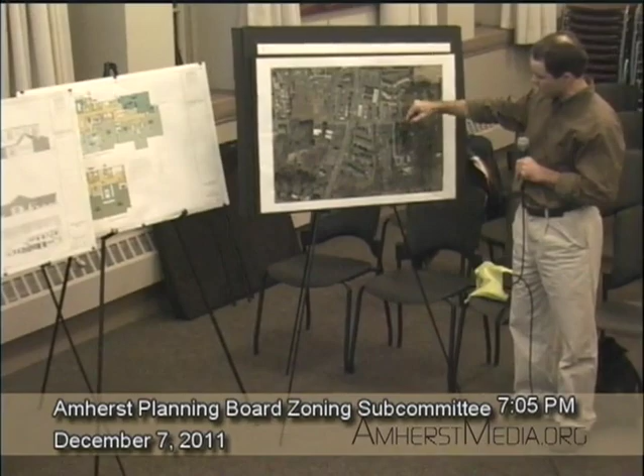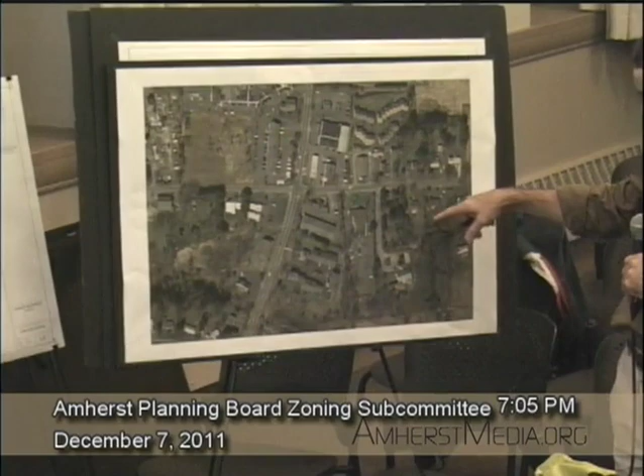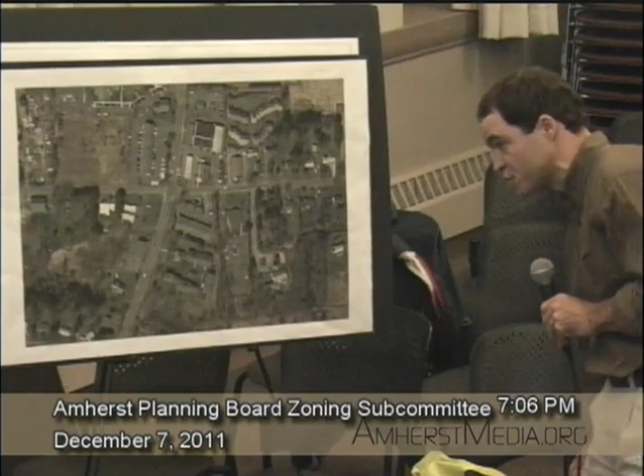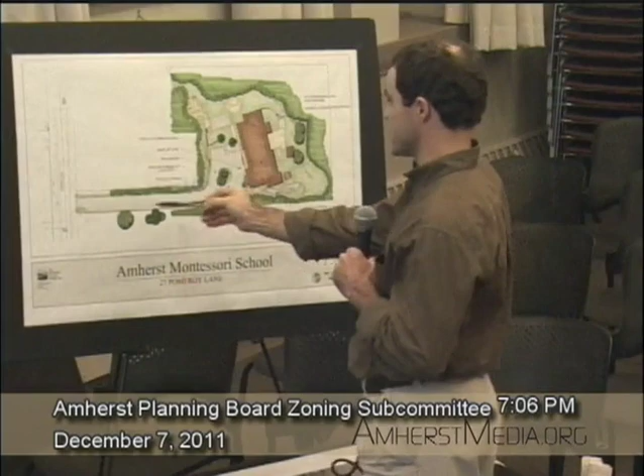Currently, there's a paved access drive that comes in with a loop circle in front of the existing building. There's playground on the north side, on the south side, the existing site beyond the building addition is really having minimal changes made to it. The proposal is to add a roughly 5,500 square foot two-story addition. The existing building sits here. The proposal is to add a 2-story addition on the west side of the existing building. There's a lawn area there now. That's where the addition is proposed to go. In addition, because of the drainage issues, circulation issues, and parking issues, we are proposing to improve the existing circulation and driveway loop that comes in from Pomeroy.

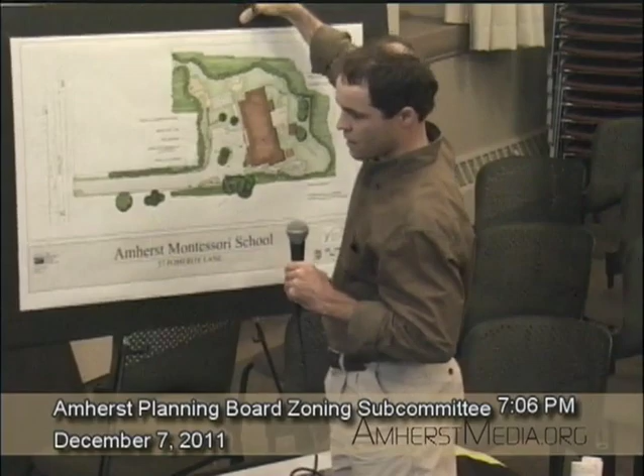Is there a way to? I can pull these back. Yeah. Sure. Rotated? Yeah. See it. Let me put this down for a minute. Combined easels.

So I was saying, the proposal is to maintain this edge of the parking lot, the existing drive where it exists now because of wetland issues. There's an L-shaped wetland, essentially a drainage swale on this side of the driveway. The rest of the site around this side is also wetland. There's also a 75-foot no building zone that we need to adhere to in terms of the building. So in terms of overall site constraints, we're very limited as to what can actually be done.

So as I was saying, this edge of the pavement is proposed to remain the same. Right now there's parallel parking that they utilize on the west side of the road. Most of the cars end up parking in the grass area, the muddy area, gravel area. So we're simply proposing to construct actual parallel parking spaces there that are 8.5 by 22 feet. We've got a 17.5-foot drive aisle. This loop is largely remaining in the same location. We did realign the parking slightly at both ends so that it's more head-in and it creates a better circulation pattern. We've widened it slightly in front of the building to provide a drop-off lane and loop for cars that are leaving children for the day.

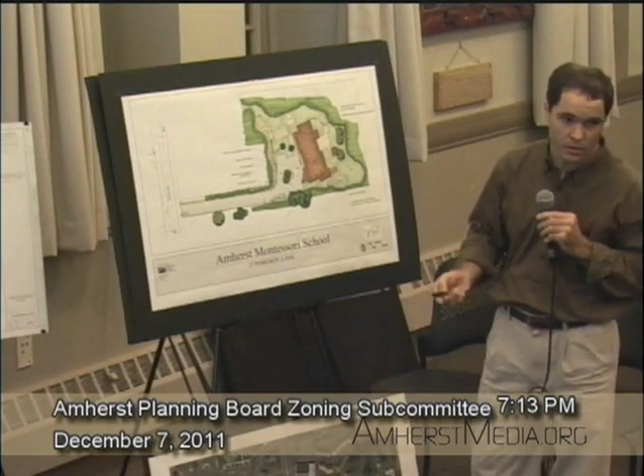Right now on site, there is no stormwater treatment. The entire stormwater system consists of catch basins and pipes. There is no treatment effectively. There's a couple of sumps in some of the catch basins, but really the water that's being discharged now is largely untreated. This rain garden allows us to treat, like I said, 80% of the impervious parking area. We treat it to 90%. The rain gardens get 90% TSS removal. That's what we're treating before we discharge it.

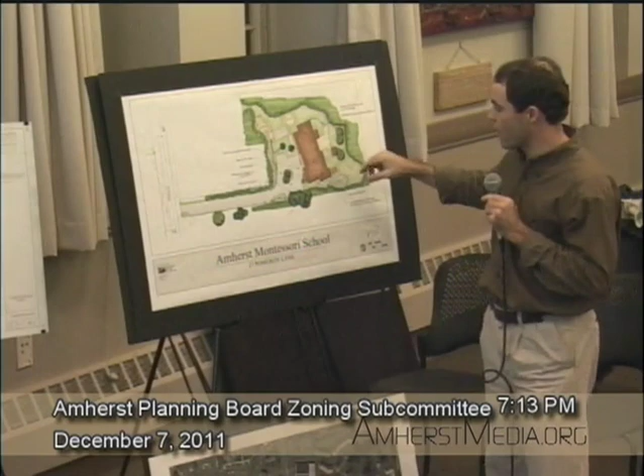We recognize that the additional impervious surface creates an additional volume. To compensate for that, we're proposing a subsurface detention basin. Because groundwater is so high out here, groundwater is roughly at 24 inches or so, obviously the concern is that these subsurface elements, if you will, collect groundwater. So to alleviate those concerns, we've lined both of those structures.

So we've got a liner on that rain garden. The detail for it is in compliance with DEP standards, with the under drain, the soil layers that need to be there. This structure is also lined. Essentially, it's just a stone trench with a pipe to hold that volume of stormwater. We are matching pre and post flows coming off the site.

That is typically what's required, and the standard that we adhere to on any project is we match pre and post flows coming off the site. We treat it. That's what we're doing. We received comments from Jason Skillings, town engineer, this afternoon. I guess what I'd like to do is talk through some of those concerns, the larger stormwater issue, because my hope is that you can get an understanding of what the situation is now, how it relates to the adjacent sites, and how we're proposing to address all those issues on this site.

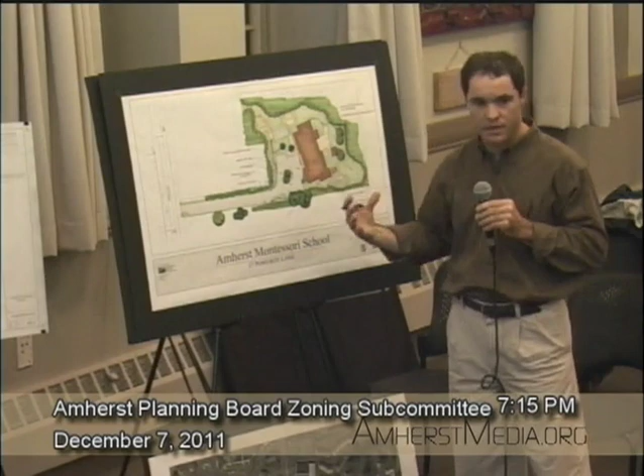One of the goals, obviously, we would love to get a conditional approval tonight. I realize that letter is a little scary, so that's why I want to talk through it. The reason for the need for an approval tonight is because the Montessori school's construction schedule is set up such that they're hoping to start construction early spring and be done in September, which alleviates a lot of other site-related and financial issues that come up later, i.e. the need for potential modular classrooms. If they can get everybody out for the summer, get all the construction done for the school year, that issue may go away. It's a whole snowball of issues related to that aggressive construction schedule and taking advantage of the summer construction period.

Stormwater-wise, let's start with this one. So what is going on right now is that originally these four parcels were all one property. We've done an extensive amount of deed research. We've met with Jason Skeels a number of times, had this discussion, and understand now, just as of Thursday, what is going on. And also, just so you understand, the comments he made in his letter were from the notice of intent plans, which were submitted 2 months ago. And so we're a little bit frustrated that we didn't receive those until this afternoon.

I'm going to interrupt you for 1 second and let Chris Brestrup weigh in. I'm just wondering if the planning board would be able to see the various parcels and how everything relates to one another with this plan as opposed to that plan. Sure, that's fine.

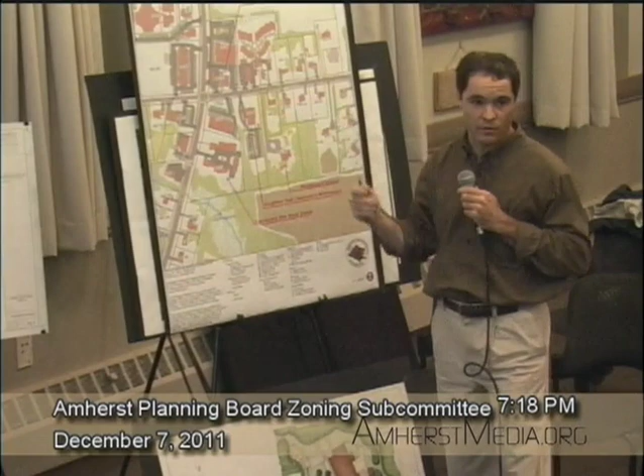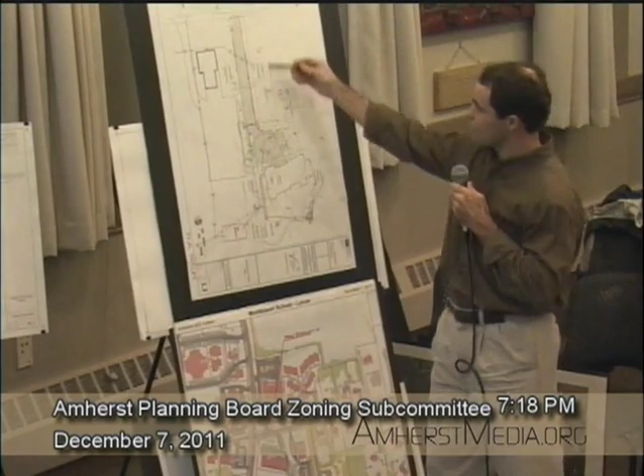When the Kingdom Hall site got approved, and we've got some plans that we were finally able to dig up, the proposal was to construct a detention basin in the rear of the property, which is there. For stormwater, I'm going to use 2 plans if I can. I will try to orient you in the same direction if that helps. So this drive, circle and building is this drive, circle and building. Could you put it on the other? I can do it on this board, yes.

And so right now, when this site plan was approved, it included a detention basin in the rear of the property. It included catch basins here, here, and here. All of the water from the parking lot is directed into 2 swales in the back here. This was designed so that the water from the parking lot would get captured in these swales, come into this existing detention basin, and then be discharged through an outlet pipe on the adjacent property.

When this drive got originally installed, it again created a dam. That's the reason for this drainage swale and trench on this side. There are still issues with this. What happens is water, there are 2 pipes that come in that outlet from this drainage swale. There's one that takes water up, connects to this catch basin, and continues through that system. That takes about a third, maybe a quarter, of the water that goes into this swale based on the grades.

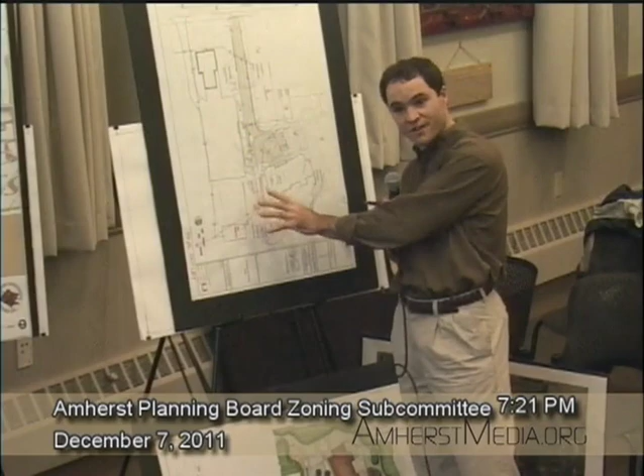Right now, none of this stormwater that leaves this site is being treated. We're proposing to treat all of the stormwater that's coming off of this paved area to 80%, holding in our basin and then discharging it. Can you explain what treat means, please? TSS removal, total suspended solids. That's what we're required to treat the stormwater to coming off of the paved surfaces. Typically, it's done with a Stormceptor, some sort of mechanical treatment chamber, or other means.

The rain garden is again an LID recommended stormwater measure. Could you say things out, not the acronyms? Low impact development. The rain gardens are a proposed stormwater treatment element that DEP is recommending in lieu of these mechanical chambers. So that's what we're proposing there, to treat the stormwater to the required treatment level. So when water leaves this location here, it's getting treated 80% better than what it is today. The remainder of the water going into this system is roof runoff or yard runoff, which typically you aren't required to treat.

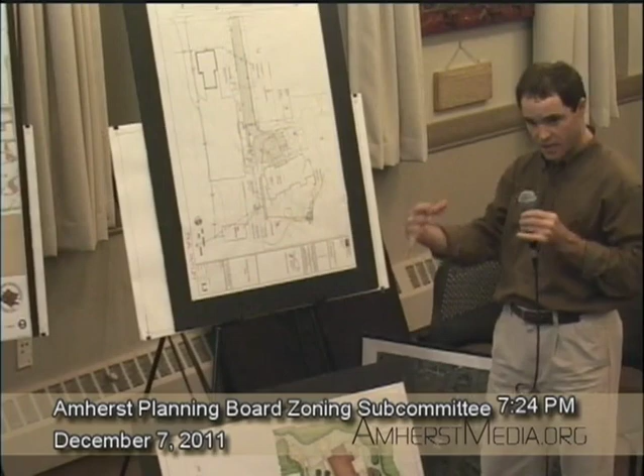The flooding concerns that occur right now on the adjacent residential properties are largely caused, particularly in the winter, when this trench gets filled with snow and freezes, and water can no longer get into those inlet pipes. This water we're capturing, we're treating, we've got measures to address any issues there. But at this location, this one's slightly lower. So to address those issues, what we've proposed, and this is what we talked about with Jason, is that rather than just the end of a pipe sticking out of the ground, to put an actual structure there at the edge of the wetland, so that we're not impacting the wetland. We don't have to disturb any BVW, any wetland requiring replication.

Put a structure in there with a catch basin on top with a grate that's at an elevation lower than this property here, so that if this does flood and fill up, water has an opportunity to get into that catch basin and leave the site and not create a dam like it does now. There's a relief valve for it, whereas today there is no relief valve for it. That's the reason for the flooding. Again, it's getting water from here across the site out to here.

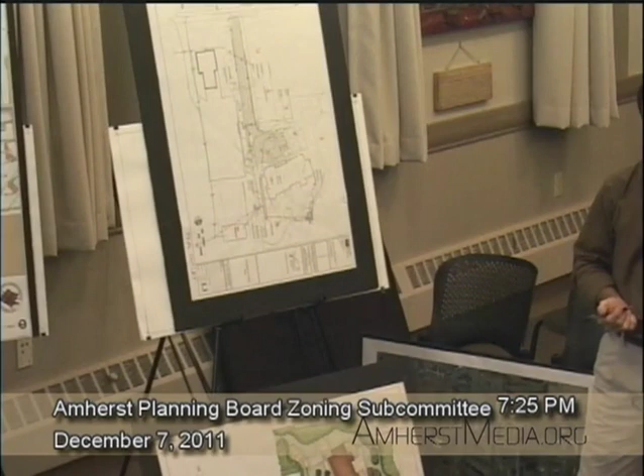I'd like to go through, I guess, quickly some of the comments that Jason had in his letter, unless there's any other questions or comments. So explain that catch basin again. Okay, so the swale, I understand everything up. Where exactly is the catch? I mean, the relief valve is?

Right now, this pipe is just a 12-inch PVC pipe that is stuck into the hillside. So when this trench gets filled with snow and freezes in the winter, water can no longer get into there, can no longer leave the site. So it just backs up. And because this driveway is higher than most of this property, it just backs up and ponds back here.

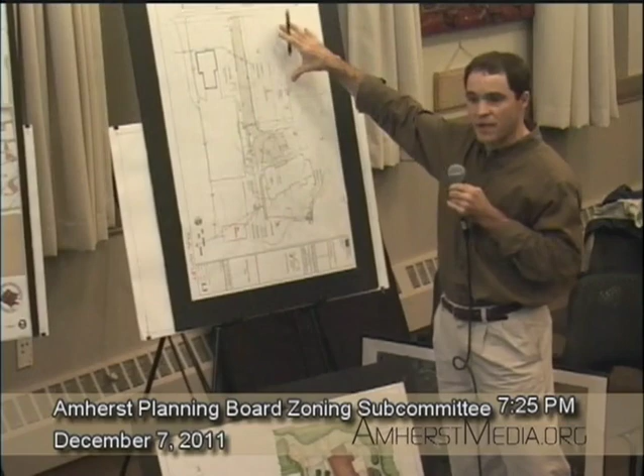So what we're doing is we're essentially picture a catch basin structure with a 12-inch hole at the bottom to match that pipe at that elevation. But at the top, we've got a catch basin grate that is lower than this property, so that even if that lower elevation, that 12 inches at the bottom, freezes, if this is filled with snow, there's still a catch basin at the surface that can take runoff, and it doesn't create ponding issues on the adjacent property.

And so that would require maintenance also, right? Sure, somebody would have to, yes. Yeah, okay.

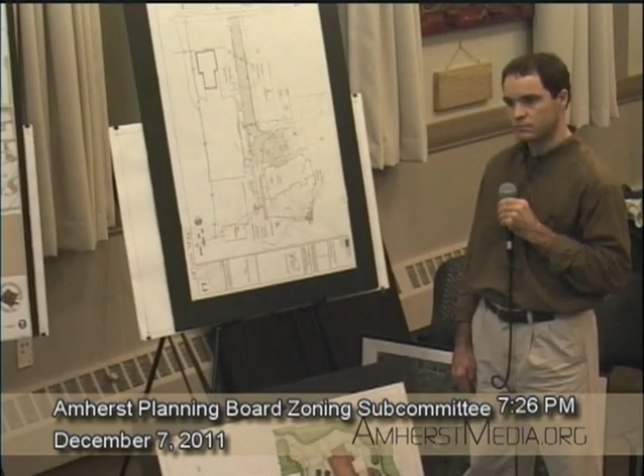If I could make a suggestion, before we dive into the real details of the drainage, sort of assuming that that's going to be the focus point, it might be worthwhile to surface what all the concerns are. Because if we're not ready to act, we have other major concerns, then you'll have given us a lot of detail about drainage that may get resolved at a later date. Well, it may be the most important thing, I don't know what my colleagues will think, I might want to have some time to explore the full range of the issues.

Sure, sure. Pull your mic down. Your mic, next time. Sorry, viewing audience. I can't hear you. Do I have to push the button to make this? Do you have to push these?

Mr. Crown, I'm finding this actually very interesting. So I wouldn't mind hearing it, but could you just say what the standard for TSS is? 80% is the standard. And you're going to 90%? We're going to 90%.

Can I ask you a question? The asphalt's already existing, and you're not planning to change that, maybe widen it slightly to allow for the parallel parking and still keep a 17 or so foot two-way? Correct. Have you given any consideration to the permeable asphalt, or that might help in the situation?

Yes, couple things. We considered gravel paving, first of all, to mitigate some of the concerns about increase in impervious. What ends up happening is that the degree of perviousness, if you will, for the gravel doesn't provide the project any benefit. It's maybe 5% different. That's the standard. So it really doesn't provide any benefits in terms of permeability from a permitting standpoint. The other concern is that during the winter, everybody knows where that gravel is going to end up. I was talking about the permeable asphalt.

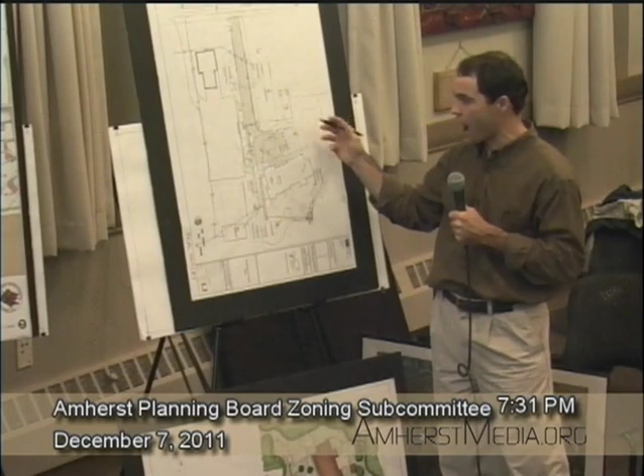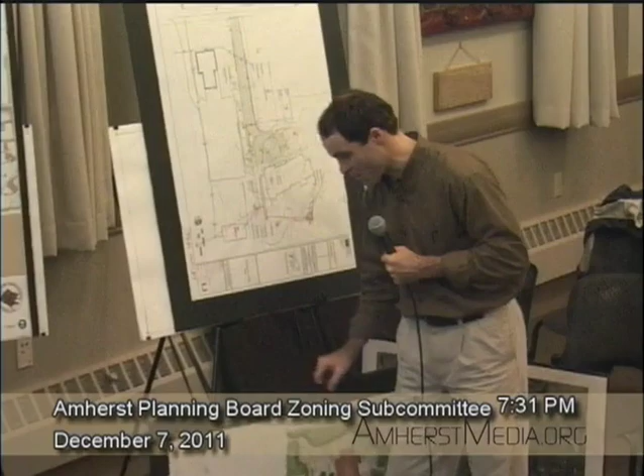I understand there may be some additional concerns, or there may have been some concerns about the ability to turn around. I'm not sure what else can be proposed beyond what we've done, because there really is no ability, given the way the property is configured, to make that loop big enough to accommodate a ladder truck or some of their biggest vehicles. Are you changing the loop area? We've very much widened it and made the radiuses more suitable, more manageable. Do you have a before and after on that?

Right now, there's a very tight radius down at this end toward the building. So to make that turn is a lot tighter. We've widened this here, so there's more of an ability to swing out, and with the addition of the parallel spaces, this radius can now swing out further than it did previously. Because right now, this comes into this drive fairly abruptly. Thank you. Sure.

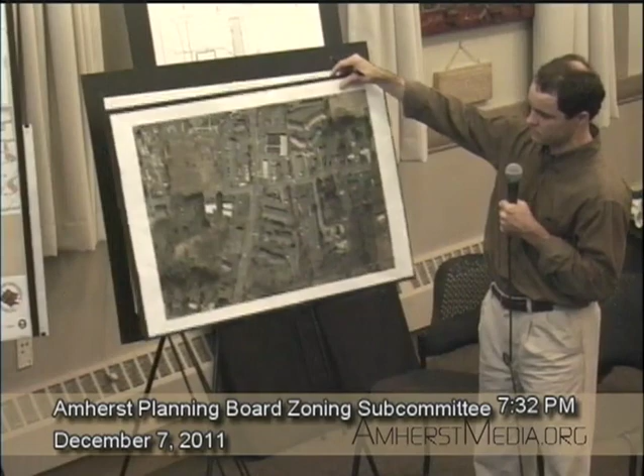Anything further you'd like to? I believe that he was about to address these points, are we gonna? Connie, did you have particular areas that you were thinking of? Okay, do we go through the hearing and then close it and then have a discussion? I'm a little unsure how to. I have some issues, but they're not about drainage, and I don't know when the right time is.

Well, at this point, have you any more pieces of your prepared presentation, or have you finished that? Like I said, Kuhn Riddle is here and is happy to present the building elevations. They are relatively new architects. The original architects, McKay Architects, are no longer on the project. Kuhn Riddle is now doing the building design. So we have elevations and floor plans updated to present tonight, if you're willing to see those.

I'm also more than happy to go through Jason's list of concerns and hopefully leave everybody with a sense of where things are at and the magnitude of some of those, because some are very minor. Mr. Schreiber? Mr. Chair, I would like to hear the response to Jason's letter. It's fine. I'll bring up my concerns after we go through the drainage. Okay, so why don't you go ahead and address Mr. Skeels' letter? Okay.

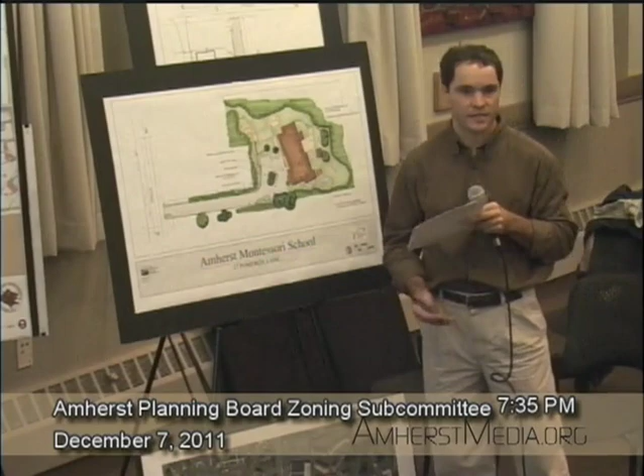So it'd be just a matter of adding or subtracting. Right. I understand. It doesn't affect the slope of pipes or any of that at all. It's all still a functioning system, just at a different elevation. Let's see.

Test pits were performed on site. No one from the office was there to witness. Our standard and our understanding has always been with the DPW that if we are proposing infiltration, if it was a sandy site and we didn't have to line these stormwater elements, and we were relying on gravity to suck the water down into permeable soils, that they need to witness the depth of that soil, the groundwater levels, all of that.

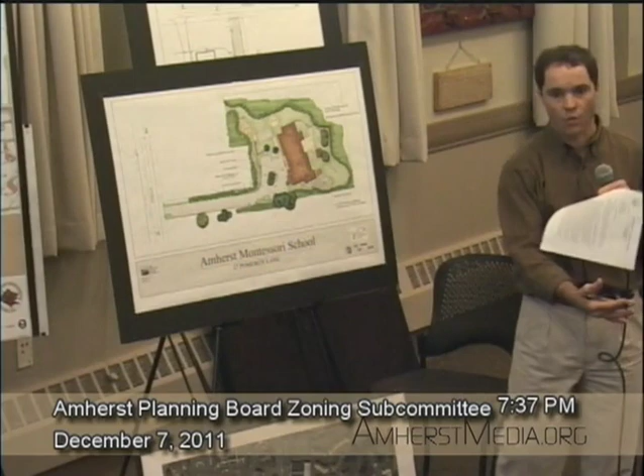Because we can't infiltrate on this site, we don't have that ability because of high groundwater, and both of these are lined as a result, the existing soil has very little or no relevance on the drainage system. Forgive my ignorance, but why do you line them? I don't understand. Because groundwater is at 2 feet below the surface grade. These systems are down 4 feet, 5 feet in some cases, and if we didn't line them, it would simply suck in groundwater at whatever elevation it was at and discharge it off the site.

So how does the water get out then, once it accumulates? The existing infrastructure right now is set up to drain the water off the site. A solid pipe can be in groundwater. I see. Got it. So is it like a giant bathtub? It's a bathtub, exactly. Giant bathtub, underground, and then if the water gets up to where the drain outlet is, then it goes, but most of it's stored. Right. And then the outlet then is below the groundwater level? Yes, and that's the way it is now.

When groundwater comes up to that 2-foot elevation, that's where the groundwater is. The existing infrastructure works because it's a closed system. The only open portions of the drainage system are these inlets and catch basins. There's no opportunity for groundwater to get into a solid pipe. We're proposing the same thing. That's what you would typically do in a high groundwater situation. This bathtub is filled with stone and a pipe. This bathtub is filled with soil and planting media, a rain garden. But the groundwater and the conditions of the soil have no relevance on the way this system is designed and functions. Does that make sense to everybody?

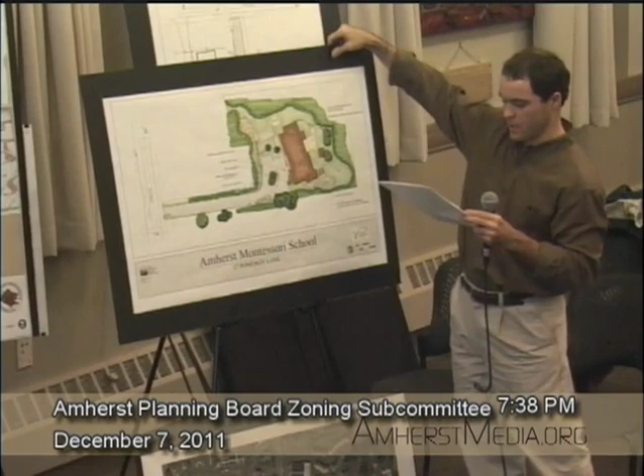Number 3, the existing drainage system discharges directly into and combines with the Jehovah's Witness Kingdom Hall property. Drainage easements, et cetera, need to be obtained. Everybody involved with the project, now that this issue has surfaced, is aware that there needs to be an agreement or cross easements between these two property owners. Not only are we discharging water to their detention basin, there's also a catch basin here in these two locations taking water from the Jehovah's Witness parking lot. There's a portion of the parking lot in this area that apparently they couldn't get back here. It goes to our property.

So everybody is very aware that there needs to be some agreement to protect everybody in terms of liability. There needs to be an easement to satisfy those concerns. It's nothing that's going to be solved tonight or next week. Now that this has surfaced as of Thursday, they need to have that discussion, and everybody is aware of what needs to be accomplished. But again, it's nothing that's going to happen overnight.

Number 4, unless specific agreements between abutters can be arranged, all stormwater discharges should be required to achieve 80% TSS removal. Like I said, we're capturing 80% of the impervious surface that we would typically be required to treat. We're treating it to 90%. The only piece we're not treating is this portion of the swale that goes into this pipe. The only way to treat stormwater to 80% at that location is to put a Stormceptor in, a mechanical system at a cost of $12,000 to capture this little piece of drainage swale, which doesn't take water from the parking lot. We've had the discussion with Jason about what needs to be treated. We're treating as much as we possibly can within reason.

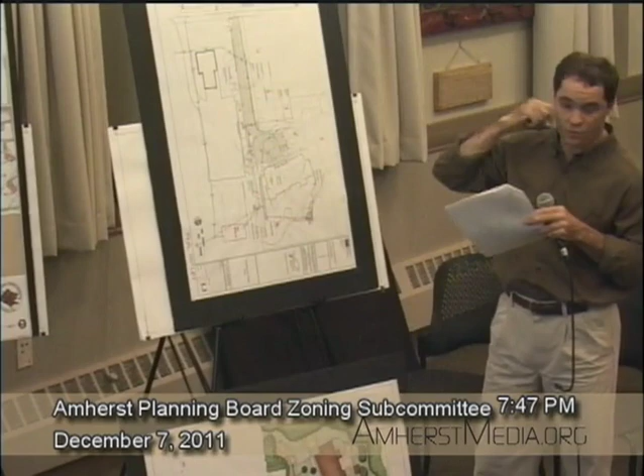The easements and agreements, absolutely. I just spoke about the need for that. It needs to happen. Include the models is what he's referring to, looking at this whole drainage analysis. That's a considerable project for what needs to be accomplished in our eyes.

To have to go out, survey this entire site, and do a drainage analysis on the adjacent property really has very little impact on what the problem is and what's going on. Again, they had approved plans for this site, a stormwater system for this site that needed to be constructed a certain way. Somebody shortcutted that somewhere, that needs to be fixed, but what we're doing with stormwater on this site is being improved tremendously. So,

no details or elevations have been provided for the subsurface stormwater detention. They were included in the plans. They were in there, so that shouldn't be an issue. Size and approximate location of the sewer service could at least be determined at the building. Will the existing sewer service have adequate capacity for the projected expansion? Our initial conversation was that it did, that it could accommodate the increase, and the

location of it isn't known between Pomeroy and the building. We know where it outlets the building. We know roughly where it comes into Pomeroy, but there isn't any record. DPW doesn't have any record. There's no way to find out until we actually start the project. But we know the size, and the size is adequate to accommodate the project.

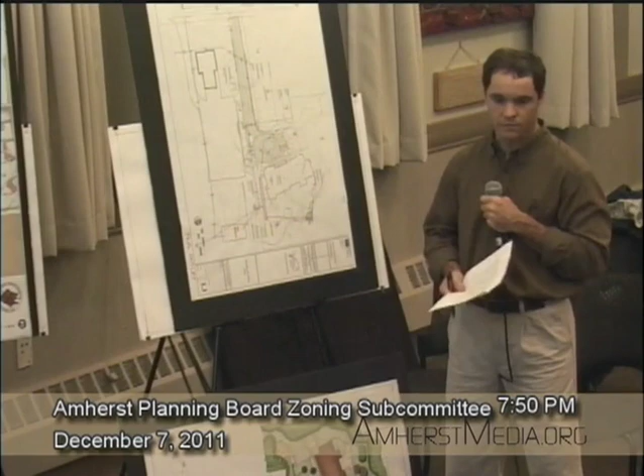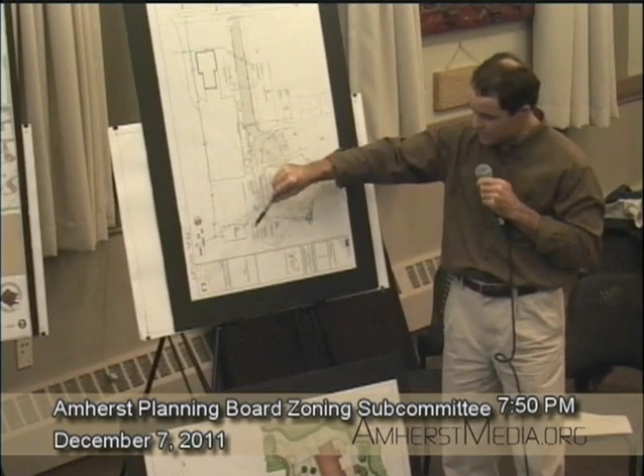So, it is a very complicated issue, but again, it really boils down to us managing our stormwater on site, meeting the typical standards for outletting stormwater from a site. The one glitch is that this pipe got installed here instead of here. That needs to be corrected. The easements, some of those other agreements need to happen. But our hope is that that stuff can be worked out in the next few weeks to a month.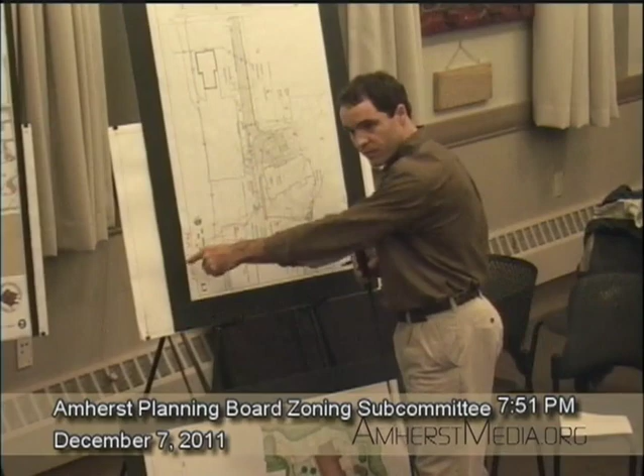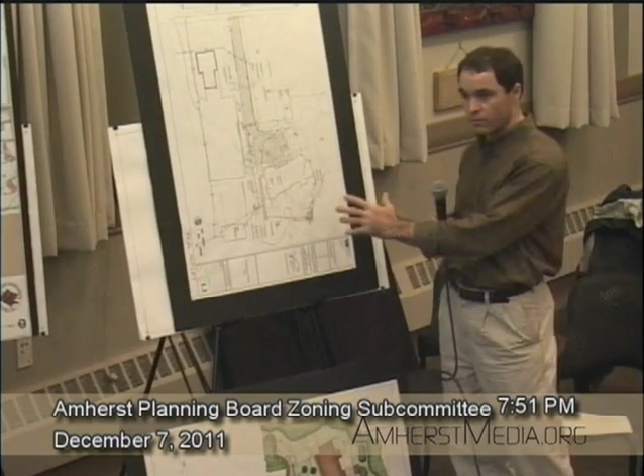We will verify that location. But everything else that we've shown on this set of plans now was what we talked about with Jason just earlier this week as a way to resolve the current issues. And it would have been nice to have had the opportunity to show him the notes and the revisions to the plan to satisfy his comments, and given him a chance to respond to that or agree to that. But that's where we are, if it makes sense to everybody.

With the additional square footage to the school, will it allow them to have more students? Will there be additional students for the school? Right now, there are 4 classrooms. You can probably speak to it better than I can. Sure. We currently have 80 students.

If you could use the microphone, please. Sure. Absolutely. You want me to sing? Sure.

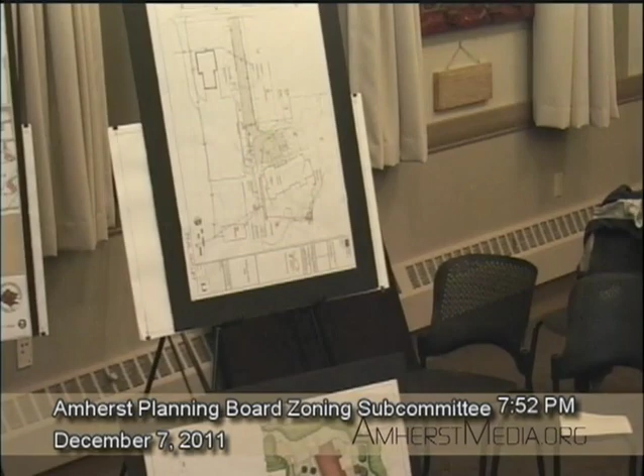Let me just stop you a second. Sure. Where I'm going, my second part of that is, are there going to be more students? And if there are, will there be additional faculty and staff? Yes. Maybe you could start by giving us an overview. Sure. Currently, we have 40 students who... Can you identify yourself? I'm sorry? Identify yourself, please.

I'm Tamara Ballas. I'm the head of school of Amherst Montessori School. We currently have 40 students who are in the current building. We have 40 other students who are in the strip mall on the other side of the Kingdom Hall. And our kids walk the sidewalk; you've probably seen them since you live on Pomeroy Lane. I do. The rope train. A little parade of them. Yes. So that's 80 children total. We'll have capacity for 120.

Why I'm asking this question while we're doing the site Q&A is with additional faculty and staff, there might be a need for additional parking. And that's what I was coming back to because we're hearing the constraints of the site. Sure, absolutely. Parking is very much on our radar. We are working on developing an agreement with one of the surrounding sites for additional parking.

We also have a big push towards carpooling and plan to have a carpooling bulletin board where people can actually arrange carpooling and use our community resources that way. About 50% of our families come from Amherst and could use the bus lines if they chose to. We also have about 20% of our population that comes from Belchertown, and so we actually do have families already who choose to carpool.

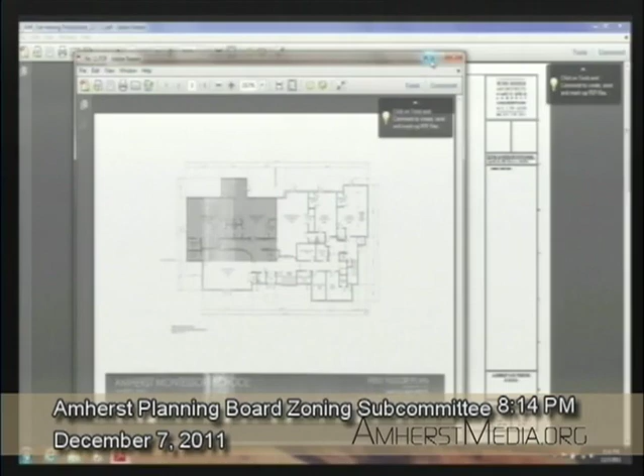So when we took this project on, we tried not to move exterior walls much at all. So I can show you on this plan here, and Rachel has it up on the screen, it's turned 180 degrees. So the existing building is this light green here, and it comes up to the line. There's something called the line of existing building, and you can follow it all the way across, and that's the existing building.

So we have stayed within that same footprint, minor adjustments. When we did come on, there were some code issues that needed to be addressed. The accessible bathrooms weren't quite big enough. There were some program issues that hadn't really been addressed: changing areas in the classrooms, lockers weren't completely laid out. We started to add more detail to the plan.

And in doing that, what we feel is a clear delineation of circulation through the building, which is marked by all of the yellow. We've created an entry core and circulation right as you come in. The elevator originally was at the end of the building, but all the main circulation is now in this one core. And then going upstairs, maybe you could go to the second floor plan of McClay.

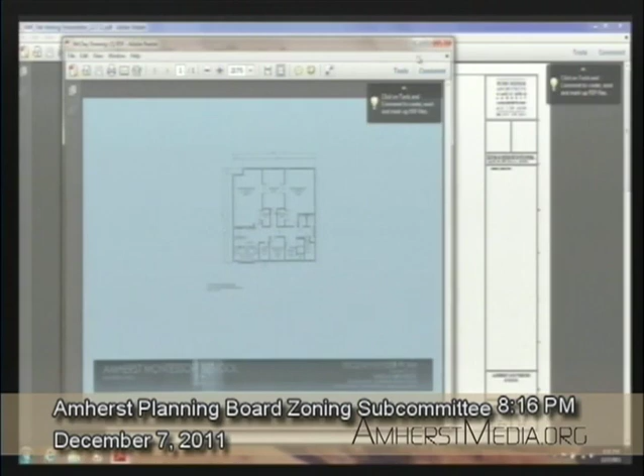So as you can see, it's very similar. We have the two classrooms, elementary classrooms, a central art room, the circulation core and a few office spaces facing out to the front of the building. So not too much has changed in terms of the plan. We could go to the elevations. Maybe you could bring McClay's elevations up, and I'll talk about them here.

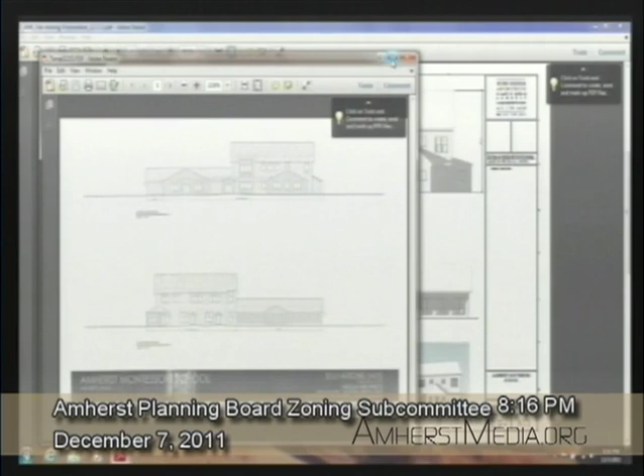So the south, I guess it's actually the north elevation, which is at the top of this view. Can you enlarge that so the board members can maybe see it over there? Had two large gables and a small gable as the entry, and then that vertical element was the stair tower. Our effort was to simplify the massing of the building and create a little bit better symmetry, and also give the entrance a little more prominence. So that front gable is the entry. We still have the covered porch where kids get dropped off and picked up.

In working with Amherst Montessori, we've come to learn that symmetry, balance, pattern is very important. And most important, perhaps, is that this is a home. It's meant to be a home for children, a place where children come to learn. It's supposed to look like a residential project. So that's where our efforts have been in terms of the front.

And then the back, maybe we could look at McClay's real quick, and then we'll come back to this one. You can see the back. There isn't too much difference. We did simplify the roof form on the addition. It has a shed roof in lieu of that hip roof. We did move some doors around.

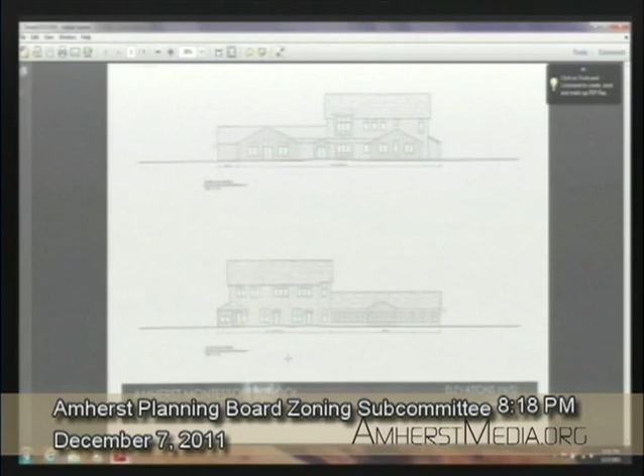Having all of the entries covered was important. They had a couple of little gable roofs over doors. We've clustered the doors together so that there are two classroom doors underneath this porch area, and there's a classroom door here, and the other classroom doors are under covered areas in the existing building. So I think that kind of glosses over the changes, and I can answer questions. Thank you very much. Sure.

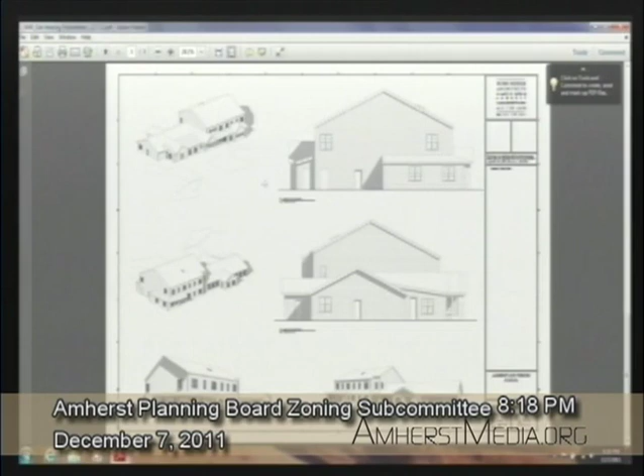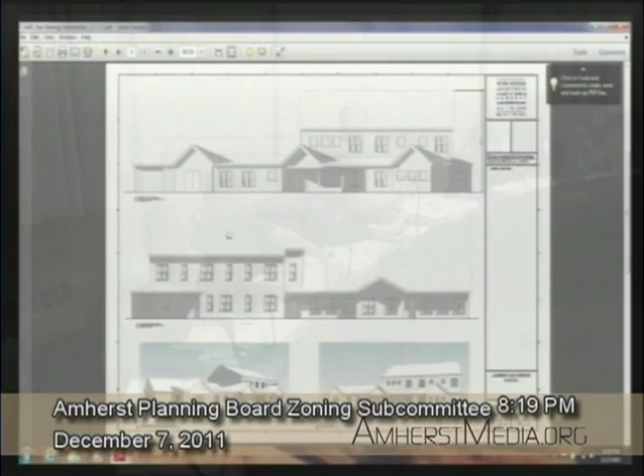Okay, any more folks presenting for the applicant? Okay, how about more discussion among the board at this time? Open season. All right, at this time, if there's anyone from the public who would like to speak about this project, please come forward. Yeah, actually. Could you come forward?

Hi, good evening. My name is David Sullivan. Microphone. I'm sorry? You got to use the microphone. Oh. It's for the folks at home. We are on TV. Oh, okay. I'm sorry. First time caller. Pull it out. Yeah. Very good. I wonder if I could just briefly comment. Your name, sir? Your name, please. Oh, David Sullivan.

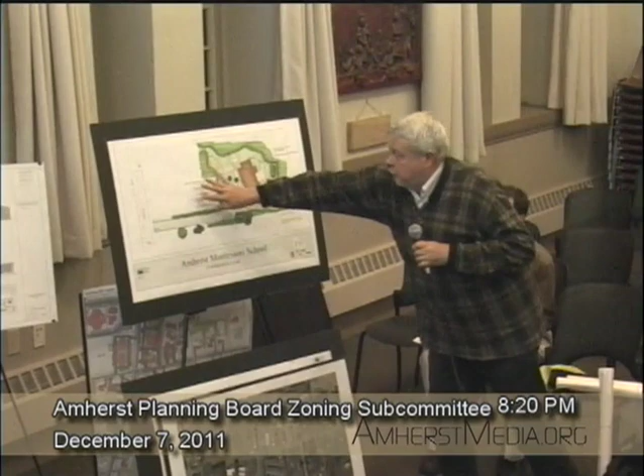The property immediately east of the driveway, parcel 20C-26 on your map, if I may. And I thank the gentleman for his excellent presentation, addressing a number of the concerns of the full-time residents of 37 Pomeroy Lane relative to the drainage issues. I have just a brief comment about a couple of practical aspects of this that I hope will be part of the overall consideration by the neighbors, with the increased volume of people here.

As a matter of practice, this area right here, even with the widening of the end of the driveway, is a right angle. And while I understand that you can't legislate good driving habits, in practicality, there is an awful lot of traffic which historically has rounded their turns into this, crossing over, in many cases, in expensive vehicles, actually driving over a pronounced curb which exists there. The widening of the driveway may make that easier to deal with.

The other matter of practicality relative to the property east of here has to do with the snow removal, which simple arithmetic dictates that with a wider driveway, there will be more snow to be pushed somewhere. And the question is then, will that be something which can be managed without it landing on the property over here as a contractor pushes the snow somewhere in the northerly direction towards Pomeroy Lane?

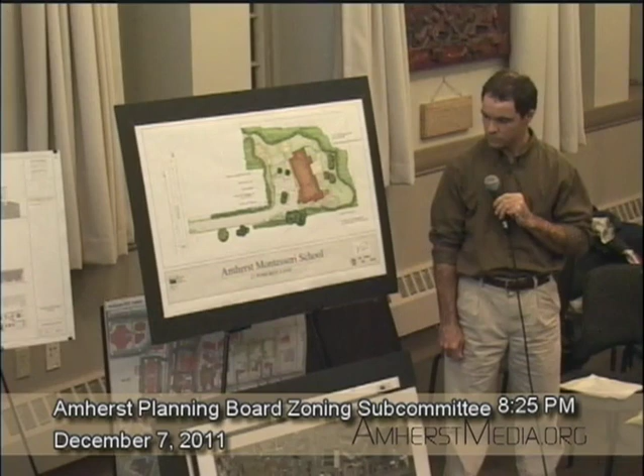Just to clarify, you said 12 feet in height. In our development application report, it says 14 feet in height. Okay, I'm sorry. So it's a little hard to visualize how the light's going to fall, and I needed some help even from Ms. Brestrup today to figure out where the lights were, but it's great that they're downward facing, but we don't really know where the light cones are going to go. Here, I see one. Yeah, I colored them red. Oh, I see. Yeah, the lights are described as standard 150-watt shoebox style luminaires, full cutoff and dark sky compliant, mounted on a 14-foot tall pole.

Okay, other public comment? Yes, ma'am. Could you please come forward, or could we pass the microphone back? On an unrelated question, is the school connected to the town sewer? Oh, could you identify yourself, please? Your name? Sullivan, I'm a direct abutter to the school. Thank you. So the answer to that question about the sewer was? Yes, it is on the town municipal system.

And does that sewer line run out the driveway and down to Pomeroy? Out to Pomeroy, correct. Is it gravity fed? Yes. So is the school, or the general grade? I think the line out here is deeper, it's minimal cover here exiting the building. There's a slope sufficient to slope to the drainage system, or the storm system. Is there town stormwater out there also? No. Okay, there's not. All right. I don't believe there's. More public comment?

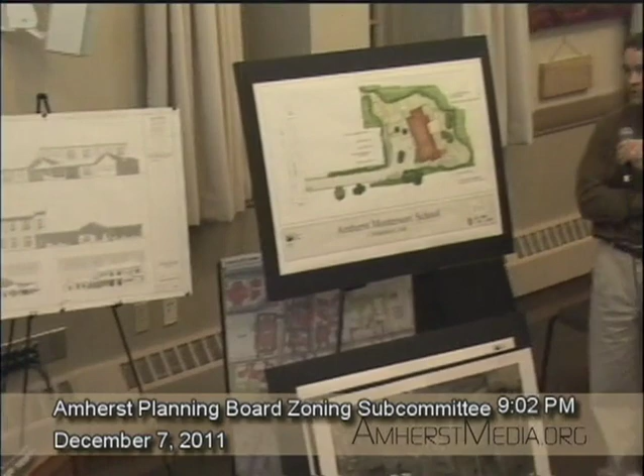And as we heard, there haven't even been substantive discussions yet about how to do this with these third parties. I think it's quite premature to be giving any kind of approval to this project with such a substantive issue lying out there. I just want to make sure that everybody's aware that by January 4th, when you have the next hearing, those issues probably aren't going to be resolved. There aren't going to be legal agreements, I doubt, in place in a matter of weeks, given the holiday schedule.

In all reality, if this is going to be conditioned on all these agreements being in place, both for the drainage, which, again, I'm not trying to oversimplify it, but what it comes down to is the fact that this drain line was not constructed according to plans. And had it been, this would be a non-issue. Most of these plans would not be an issue because all this does across this property is just a drainage line across that property. It doesn't impact their system at all.

It's my understanding that actually the bulk of the issues are about the property to the north and east and how the current driveway and drainage requirements are inadequate, especially in the winter, as they stand. Sure. Right. I think it's both. Yeah, also the one that Jeff was talking about. Yeah, you both.

Yeah, so to me, that's kind of a massive issue, particularly the easement issue that you're talking about, because it seems like the town engineer won't approve unless that easement is in place or there's an alternate, a plan B. So is there a plan B if the easement can't be acquired? There aren't any real options, because we're relying on gravity to drain this stormwater system. That's the only place to go.

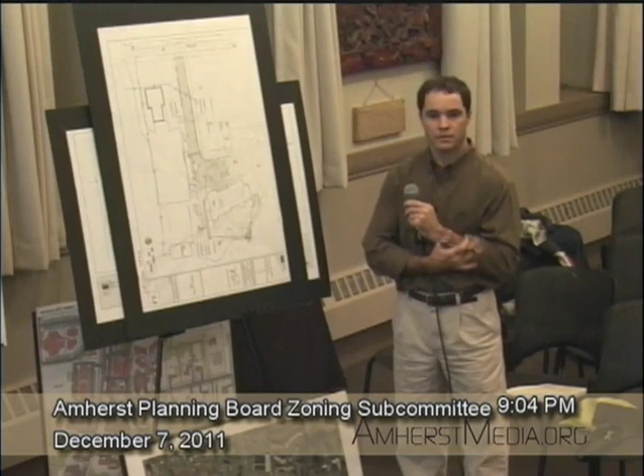I just would like to ask about the construction schedule a little bit. I understand you wanted to start building in March. What effect would continuing this to January 4th have on that schedule? How would it hold it up, if at all? Kevin could probably speak to it more than I can. I think January 4th makes things, yes, it makes things tighter. It constrains things a little bit. It may impact things a little bit financially, but I think it may be workable.

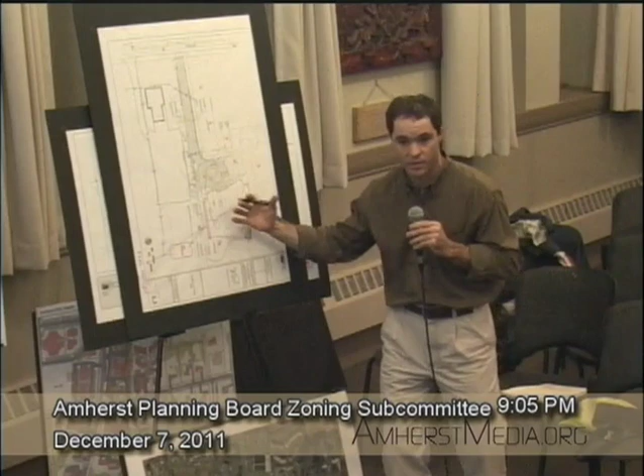I think where we run into the issue is if it's conditioned on having all these agreements and easements in place, that's not likely going to happen in all reality by that time. I think some of the parking related issues, they don't know how many spaces they're going to need to lease from somebody until we have a site plan approved, until we know how many spaces we've got on site. It's sort of the cart before the horse.

If what I'm hearing is that the preference is to reduce this to 9 spaces or 10 spaces and put a sidewalk in instead, then that means that they've got to look for some additional spaces elsewhere. If they're going to be leasing spaces, they've got to know how many spaces they need to lease, and until they have a plan that shows how many spaces they've got on site, they're going to need this number of spaces off site. We can't answer that question.

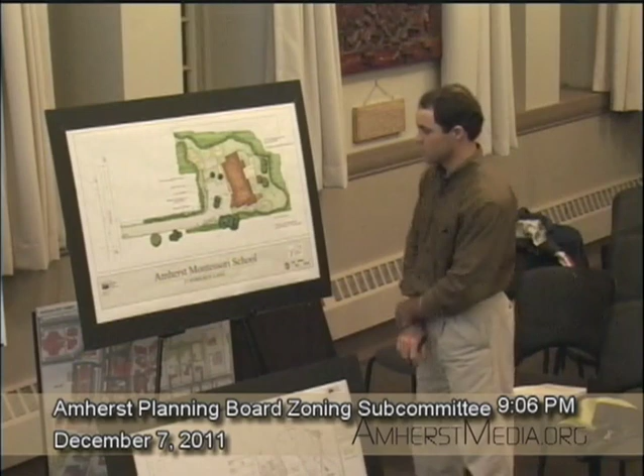Can I just speak a little bit on that too? So if it gets pushed past January 4th, we have to look at modulars. Just because of the way that we have the timeline, it's incredibly tight. But we have a construction manager who's working with us on it. Our agreement is that we can get him in the building for March 15th, and that therefore we can be in the building for September. So there are no shovels in the dirt before January 4th? No, there are no shovels in the dirt before January 4th.

Mr. Roznoy? Well, if I might, even if we didn't continue it, but there were all these conditions on approval, there wouldn't be. Right. But I'd like to point out, the architects have only been on the job less than a month. This is a very early part of this process, and an applicant, I think, has a certain responsibility to meet all the requirements of an application. I would agree it's a good faith application. I think we're going in the right direction. But it's not just a few conditions that we're talking about as we apply to other conditional permit approvals. These are some of the substantive issues underlying this application.

Can I just respond to that real quickly? We actually were working with McClay Architects for quite a while on this project, and we've been working with Berkshire Design Group for, I want to say, a year now. So this is not like a flash in the pan. I didn't mean to imply that. No, I understand, but I just want you to be aware that we've actually been working on this project since I came on board. We hired a director of development when I came on board, which was 3.5 years ago, and we've been intensely working on an on-site option for a good 6 months. So we're doing everything we can to get all of our ducks in a row.

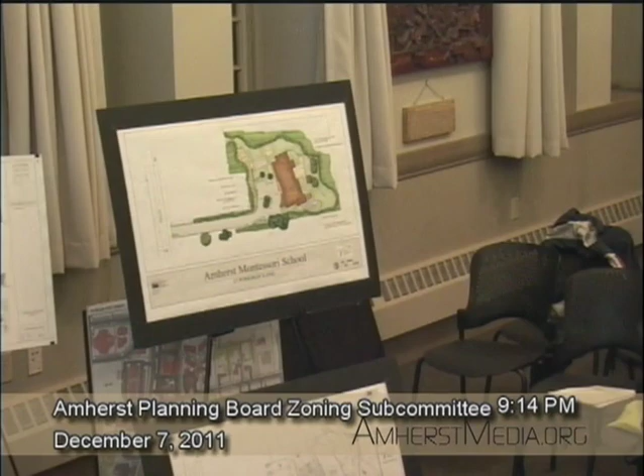Thank you. I think at this time we might like to move to a vote on this motion that's on the table to continue this public hearing to January 4th, and to give the applicant some homework as we've been discussing. Does anybody want to weigh in with further discussion before we have a vote? I'm sorry. Mr. O'Keefe? Did you want to discuss what that homework would be before the vote, or would that come afterwards? We've discussed it pretty thoroughly, don't you think?

Sure. I guess I would like us to conclude by enumerating specific items. And so I'll lay out there for consideration a letter from the town engineer that indicates his approval of the revised plan that he will have seen by that point. I'd like him to be satisfied on all points and not just have a representation that the plan satisfies him. That would be the most significant one as far as I'm concerned.

And the other one that I would specify would be either a lease agreement or at least a memorandum of understanding with regard to leasing off-site parking spaces for the employees. Mr. O'Keefe, would you accept just a letter? Yeah, that's what I meant by memorandum of understanding, yes. Mr. Schreiber? Can I suggest that we say not all points from the town engineer, but most substantial points, because there will always be the standard conditions? Sure, like having no substantive objection.

Okay. Is the applicant clear on what we're asking for? Before, was the fire department comment? Fire department was mentioned. Oh, okay, was that part of what you were enumerating? You were very nicely enumerating them. Yes, those were the main points of concern for me. For you, okay. Yeah, we had questions about the letter from the town engineer. Letters of understanding regarding parking.

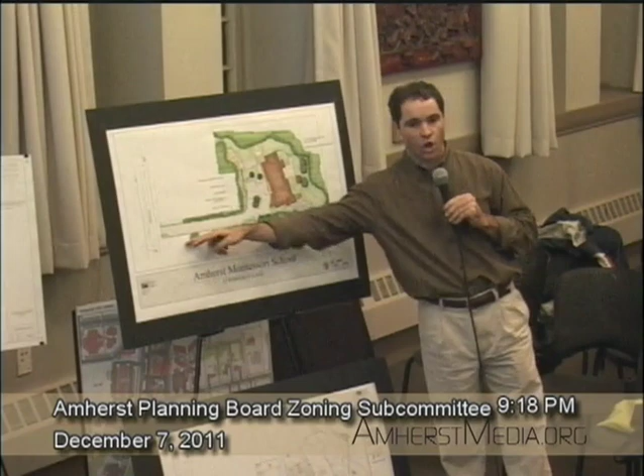Okay, so maybe when you're negotiating your drainage easements with the Kingdom Hall, you could also try to negotiate a pedestrian access easement over that portion of the land to generate a walking path. Yes, because didn't I read that there was an arrangement, I'm looking for the head of the school, I don't know where she went, but for evening activities where parents might come, that they might use that parking lot, and how would they get there?

I think requiring a pedestrian access easement or something to that effect gets a little bit more complicated, because now we're starting to change drainage patterns, we've got more impervious, there's other things to consider. It's not as simple as saying yes. Just trying to think outside. In all reality, walking down that lawn, that strip, if that's where people are gonna walk. This edge is right at the top of that ditch. This is the only place to walk.

Yes. I also need to speak to this. We have approached the elders at the church several times about crossing through their property with the children, because we're concerned about them walking along, even on the sidewalk along Pomeroy. And they have always deferred to the elders in New York, and it's always come back as a no. We've repeatedly reached out to them on different fronts, and they have let us use their parking at events, but will not put that in writing. Thank you.